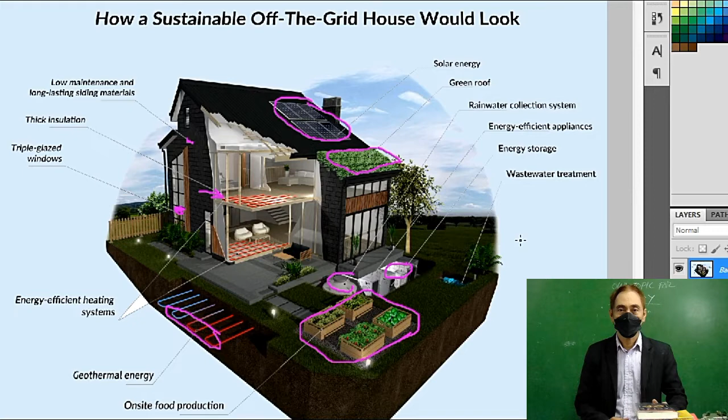Also, your smart house will have an energy efficient heating system, geothermal energy right here, on-site food production. Of course, you need a space to plant veggies, and most important is your off-the-grid power, the solar energy panels. Also, you have your green roof for added plants, rainwater collector system right here, and energy storage, some kind of chargeable battery, and your wastewater treatment.

Now let's look for other diagrams for your off-the-grid smart house.

So you need to maximize the energy available, the solar energy. So the angle of your panel must face the east, especially in summer time. The angle of the panel is so important to absorb more energy or heat energy from the sun.

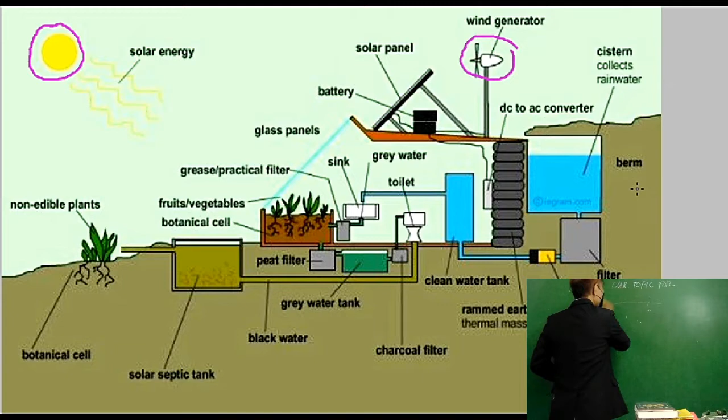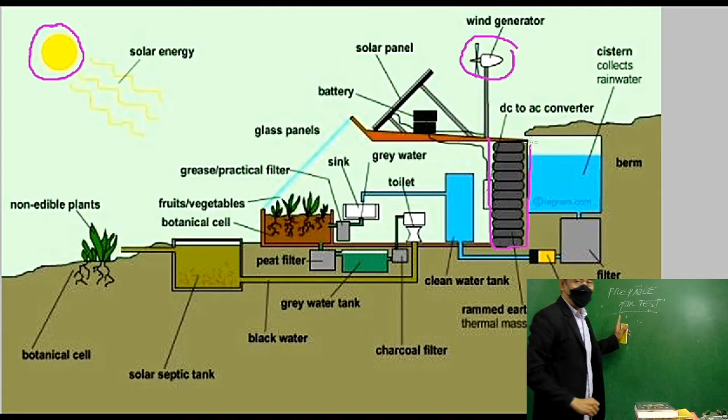You must have also a wind generator in case your solar panel will not work. You have your wind generator as a replacement. And right here are batteries. These are DC to AC converters.

You have your rain collector here, and also watering the plants coming from the gray water in your house. Right here we have the sink, which the gray water will enter and will be fed into your plants.

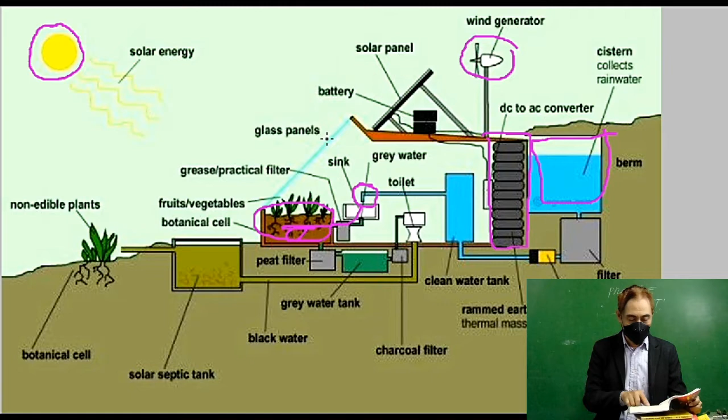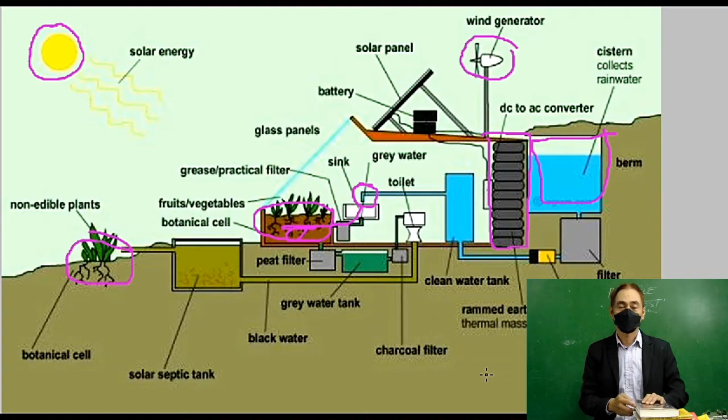Okay, so this is a good diagram for your off-the-grid simple house design. Let's go to the other diagram.

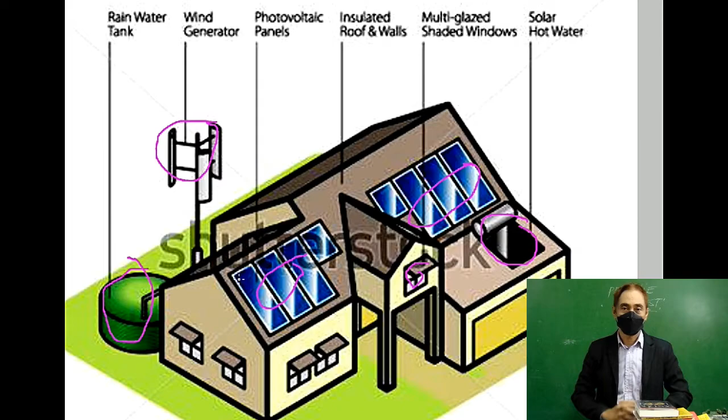Okay, here it is. This is solar hot water here, multi-glazed windows. Here are some solar panels that will generate more energy, the wind generator and the rainwater collector. So this is a simple diagram for a simple small off-the-grid house.

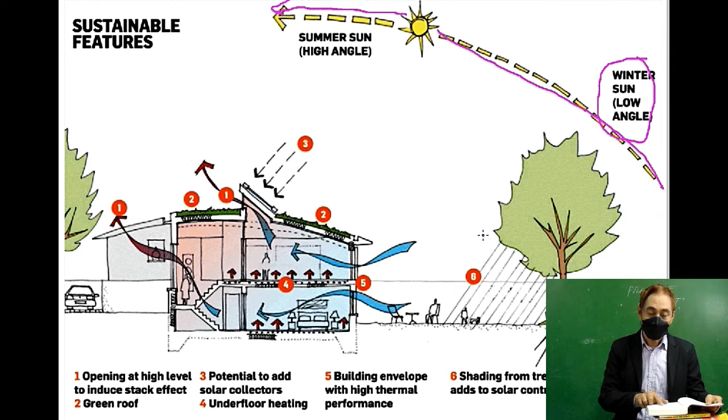Okay, sustainable features. What are these? Just maximize the summer sun at the high angle during summer, but in the winter, sun is low in angle. So you have to plant trees beside your house. It will help reduce heat and also will resist against winds.

So number one, opening at high level to induce stack effect. You use green roof here. Number two, you have plants here, vegetables, whatever it is that you can cook. Number three, potential to add solar collectors right there.

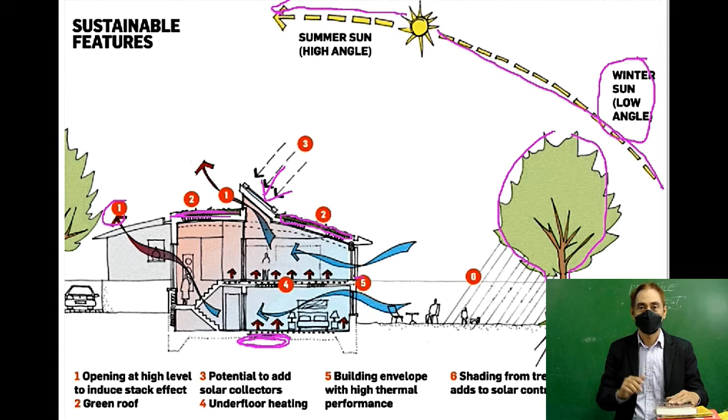Also, you need underfloor heating during winter time. In the Western Hemisphere, of course, it is cold during winter, but in the Philippines we have only two types of climate, that is rainy and sunny. Number 5, building envelope with high thermal performance, right here, and shading from trees.

Okay, other diagram for the energy efficient house. Here it is. You must have LED lightings. LED gives much more light than incandescent bulbs, and it only uses low energy compared to the traditional bulbs.

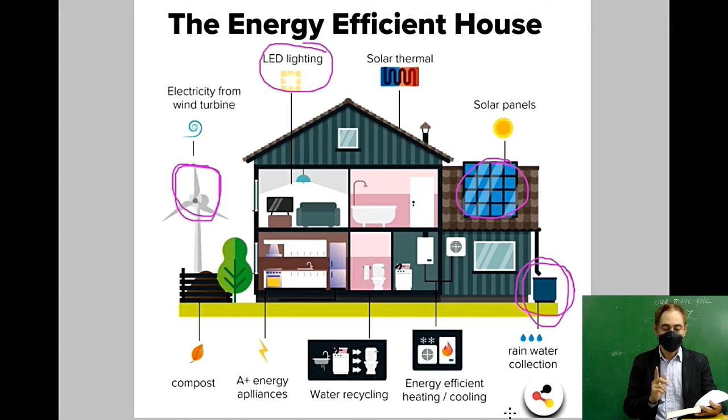Right here, the turbine, the wind energy, solar panels, and never forget the rainwater collector, because you're off the grid, of course. There is no commercial water that will be tapped into your house. Water is very much important next to lights.

So you need also an energy efficient heating cooling system, and you must recycle water.

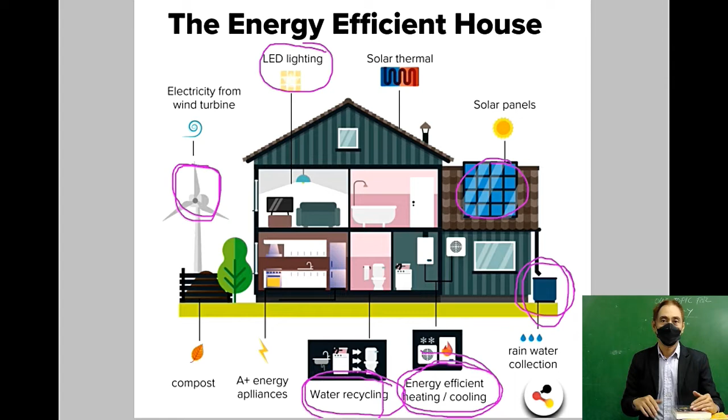So how is it to live off the grid, away from the city, away from the convenience of your life. Alright, hang on guys for a while.

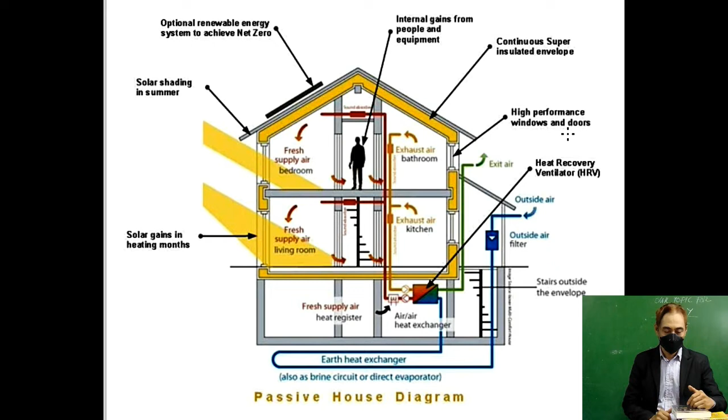Coming up will be a discussion about the 5 elements of sustainable design that you can use to maximize efficient energy, or to maximize the design of your sustainable homes.

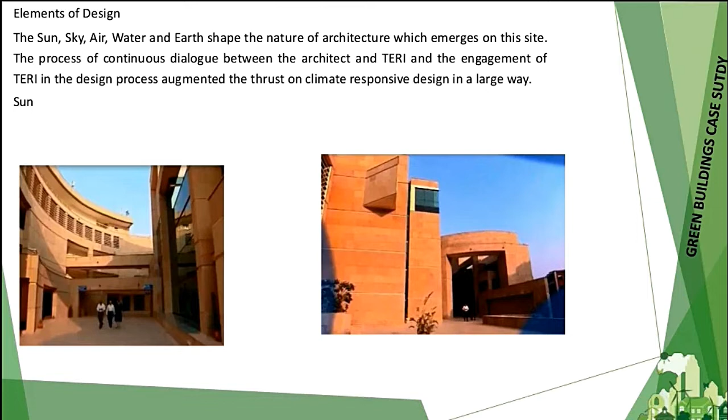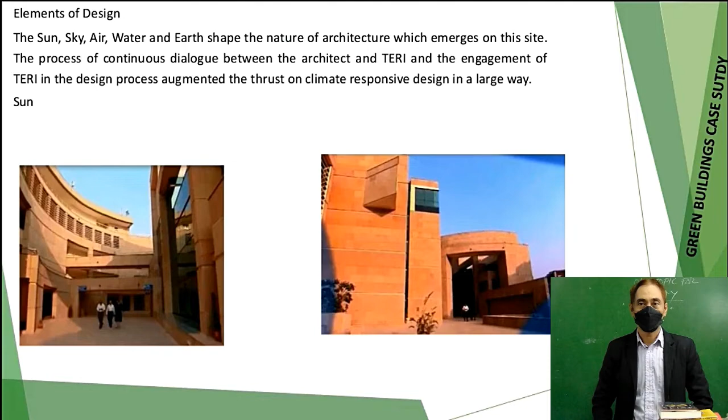Our topic for today is about elements of design of a sustainable building. Okay, these are the elements: the sun, sky, air, water, and earth shape the nature of architecture which emerges on this site. The use of the sun, or the natural heating or lighting.

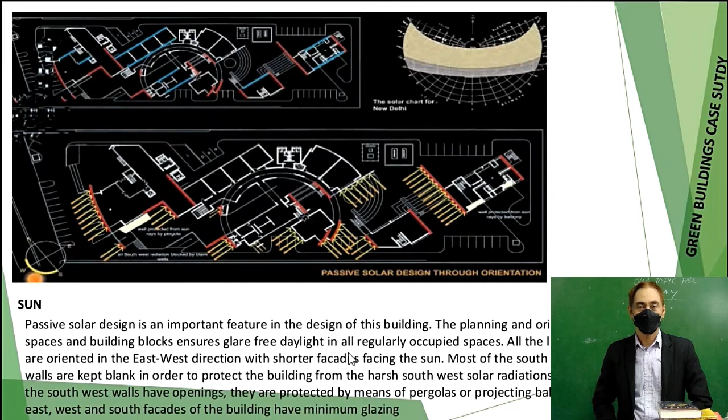The passive solar design is an important feature in the design of this building. The planning and orientation of the spaces and building blocks ensures glare-free daylight in all regularly occupied spaces. All the linear blocks are oriented in the east-west directions with shorter facades facing the sun.

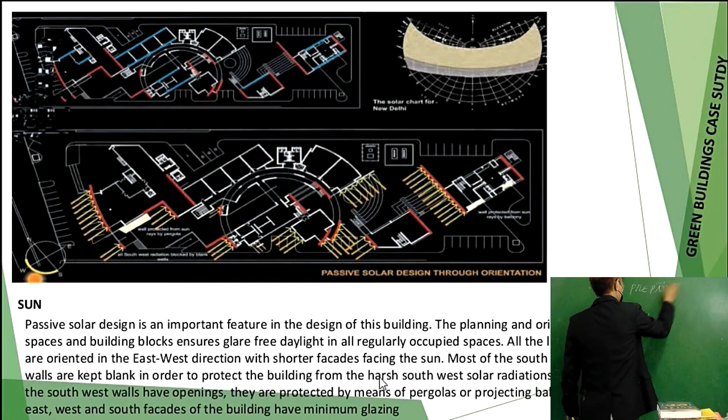Another element of a green sustainable design is the usage of natural air. The predominant wind direction is taken into account in designing the open spaces. The central atrium acts as an air funnel defined by the other buildings.

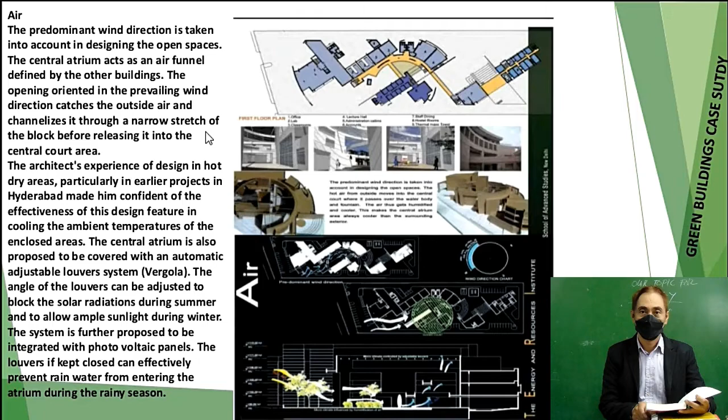The opening oriented in the prevailing wind direction catches the outside air and channelizes it through a narrow stretch of the block before releasing it into the central court area.

Sky, okay, is another element of a sustainable design. Maximum use of daylight and use of light sensors to regulate the use of artificial lighting in the interiors is another key design strategy. In areas where daylight is available, fixtures have been fitted with continuous dimming electronic ballast.

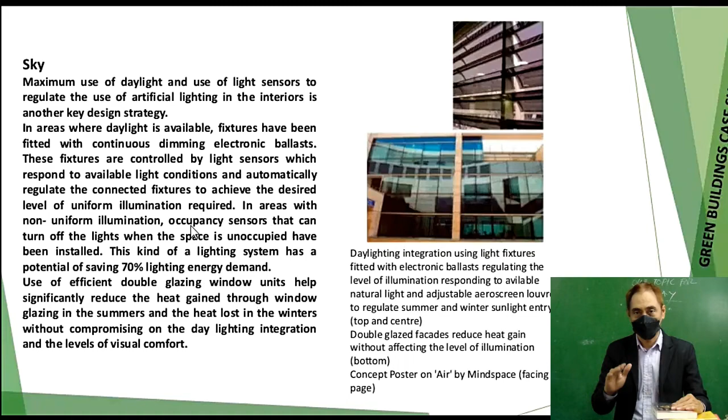These fixtures are controlled by light sensors which respond to available light conditions and automatically regulate the connected fixtures to achieve the desired level of uniform illumination required. Incorporation of water-saving fixtures, rainwater harvesting was an important concern in the design brief from the very beginning.

Rainwater harvesting is key to minimize the use of commercialized water supplies. Water and waste management systems are important features of the building design. All buildings in the campus have been provided with low-flow fixtures such as dual flush, low-flow taps, and sensor taps that result in 25% saving in water use.

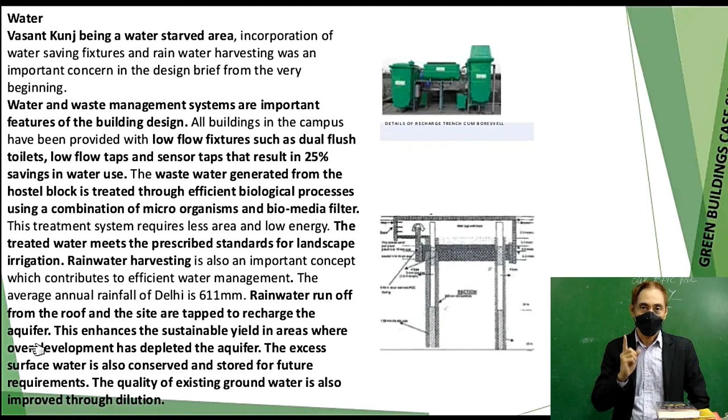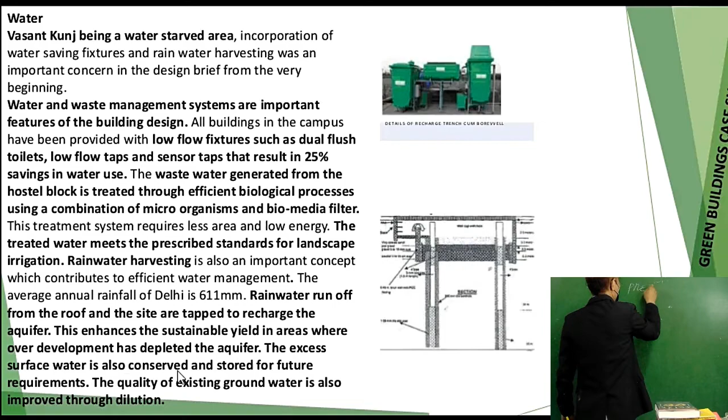Rainwater harvesting is also an important concept contributing to efficient water management. Given the average annual rainfall of Delhi, India, rainwater runoff from roofs and the site are tapped to recharge the aquifer. This enhances sustainable yield in areas where overdevelopment has depleted the aquifer, and excess surface water is conserved and stored for future requirements.

The campus is equipped with three types of cooling systems: variable refrigerant volume system, Earth Air Tunnel (EAT), and thermal mass storage. The VRV system is proposed for the peripheral commercial block and administrative block of the institute. The use of the Earth Air Tunnel gives an energy saving of nearly 50% compared to conventional systems.

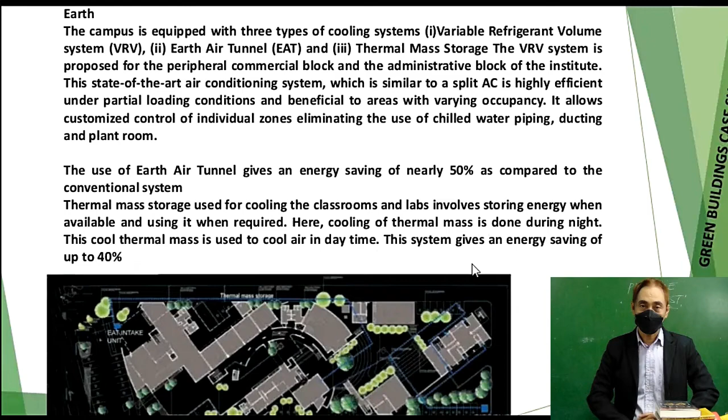Thermal mass storage, used for cooling the classrooms and labs, involves storing energy when available and using it when required. Cooling of the thermal mass is done during the night, and this cold thermal mass is used to cool air in the daytime. This system gives an energy saving of up to 40%.

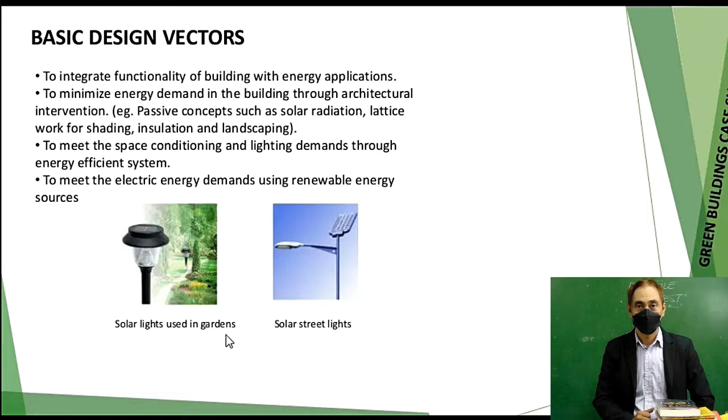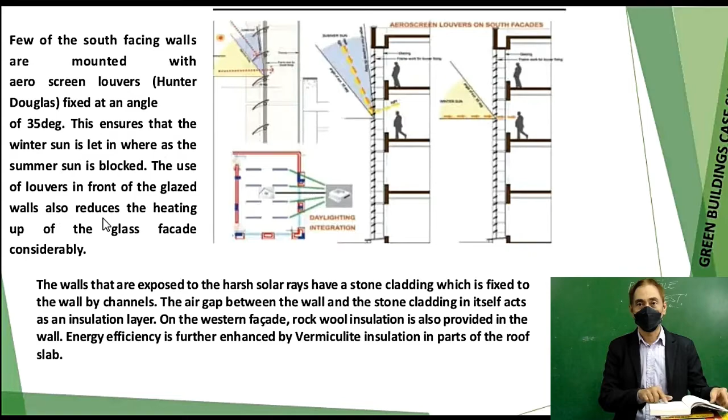A few of the south-facing walls are mounted with aero screen louvers fixed at an angle of 35 degrees. This ensures that the winter sun is let in whereas the summer sun is blocked. The use of louvers in front of glazed walls also considerably reduces the heating up of the glass facade.

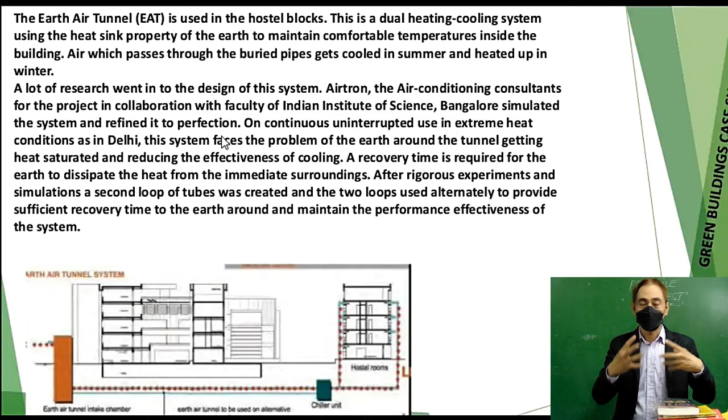The Earth Air Tunnel is used in the hostel blocks. This is a dual heating-cooling system using the heat sink property of the earth to maintain comfortable temperatures inside the building. Air passing through the buried pipes gets cooled in summer and heated in winter. A lot of research went into the design of this system—Airtron, the air conditioning consultants for the project, collaborated with faculty of the Indian Institute of Science, Bangalore, to simulate and refine the system to perfection.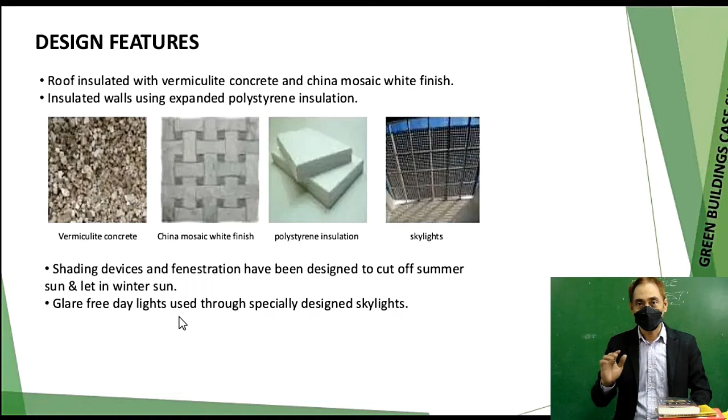Design features: roof insulated with vermiculite concrete and China mosaic white finish, walls insulated using expanded polystyrene insulation. Shading devices and fenestration have been designed to cut off summer sun and let in winter sun, and glare-free daylight is used through specially designed skylights.

Energy efficient system EAT: four tunnels, each 70 meters long and 70 centimeters in diameter, laid at a depth of 4 meters. Four fans of 2 horsepower each force air in, and the solar chimney forces air out of the rooms. Here is the diagram for the Earth Air Tunnel.

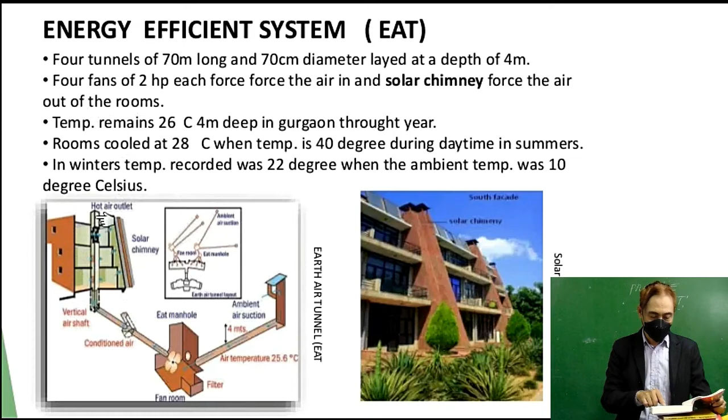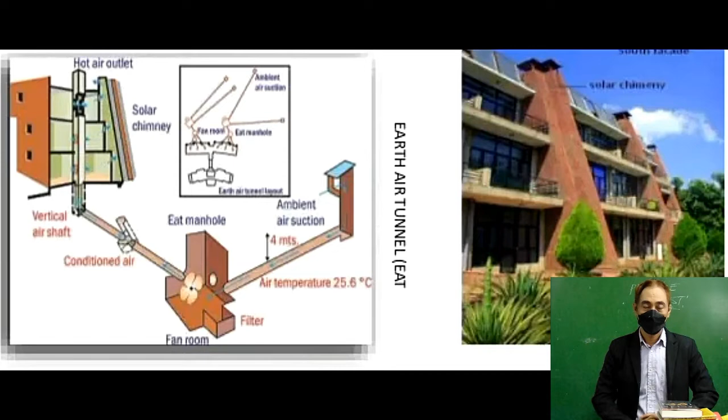In winters, the temperature recorded was 22 degrees Celsius when the ambient temperature was 10 degrees Celsius.

Energy efficient lighting uses energy efficient compact fluorescent lamps in residential quarters, corridors, lobbies, and toilets. The conference rooms enjoy glare-free daylight through the skylight.

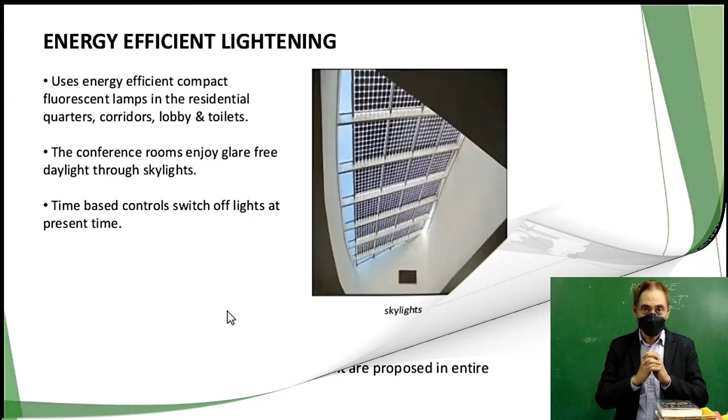Wastewater is recycled by the root zone technique, in which the roots of Phragmites plants, with special capabilities of collecting waste, are used to clean the water, which is then used for irrigation. It cleans 5 cubic meters of water every day.

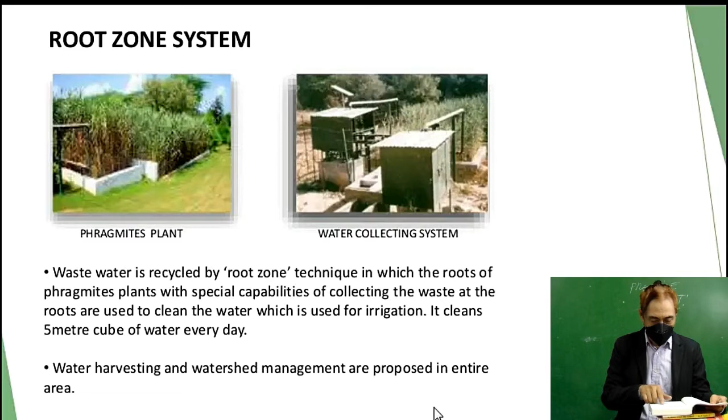Water harvesting and watershed management are proposed for the entire area.

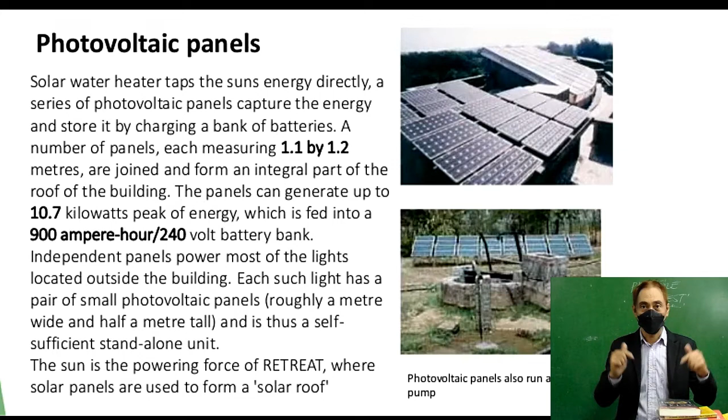The photovoltaic panels, or solar panels, and solar water heaters tap the sun's energy directly. A series of photovoltaic panels capture the energy and store it by charging a bank of batteries. A number of panels, each measuring 1.1 by 1.2 meters, are joined and form an integral part of the roof of the building. The panels can generate up to 10.7 kilowatts peak of energy, fed into a 900 ampere-hour, 240 volt battery bank.

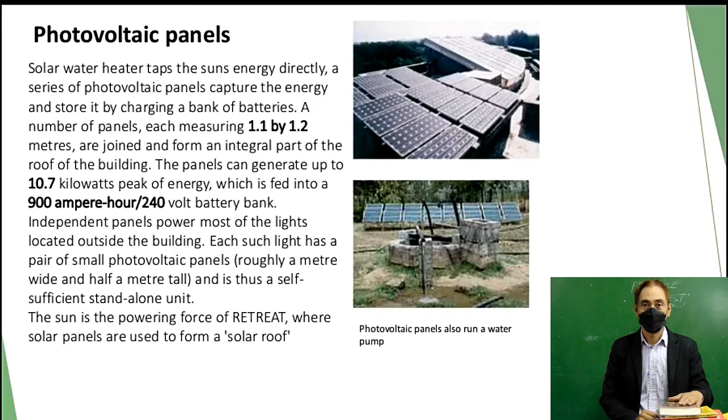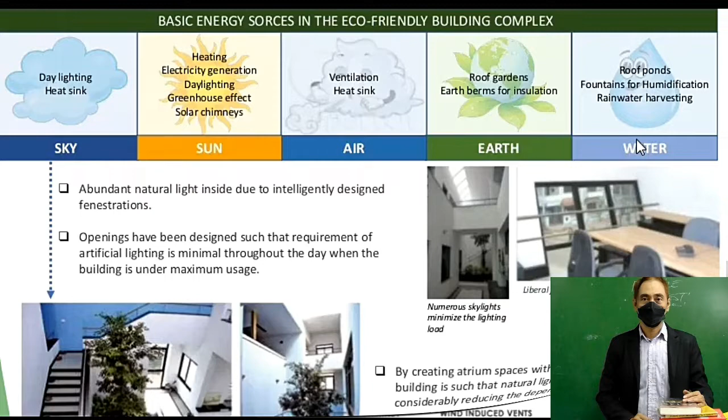Here are some details of the solar chimney in the building. The sun's rays hit the black south wall, increasing the temperature of the immediate environment around it. This causes the air in the cavity to rise upward naturally.

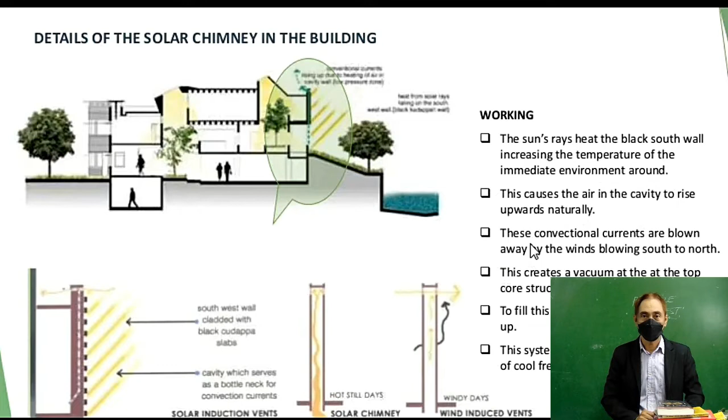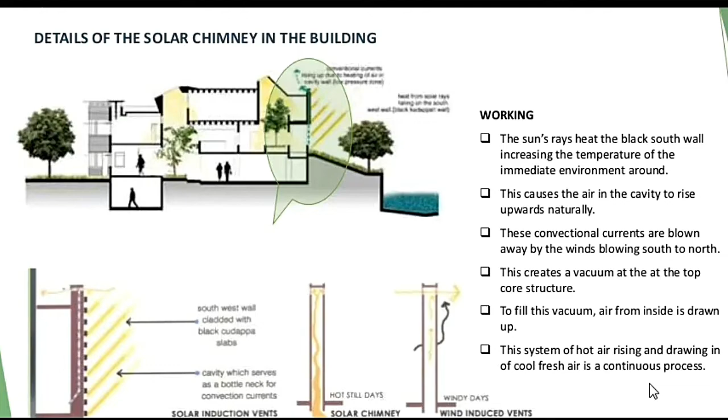These convectional currents are blown away by winds blowing south to north, creating a vacuum at the top core structures. To fill this vacuum, air from inside is drawn up. The system of hot air rising and drawing in cool fresh air is a continuous process.

The building has been designed with landscape at various levels. These courts help to enliven the working environment as well as enhance the microclimate within the structure.

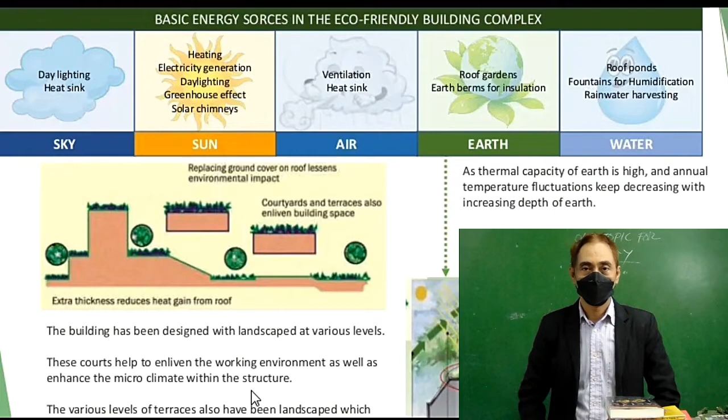As the thermal capacity of the earth is high, annual temperature fluctuation keeps decreasing with increasing depth. At a depth of 4 meters below ground, temperature remains constant and equal to the annual average temperature; an earth berm is created to retain the heat.